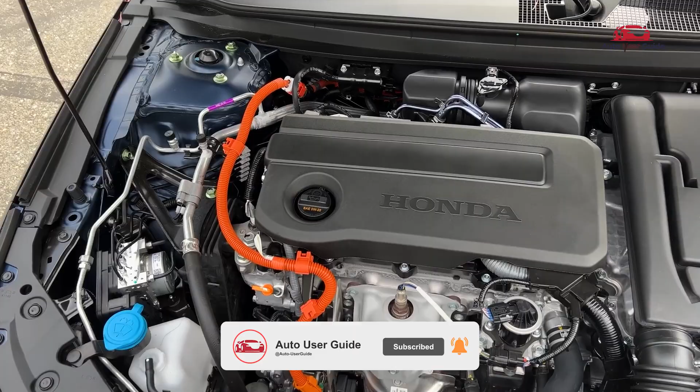Are you trying to locate the fuse box in your 2022 Honda CR-V? Wondering where each fuse is placed or how to read the fuse box diagram correctly? In this guide, we'll walk you through the exact location of the fuse box and provide an easy-to-understand diagram to help you identify the fuses for various systems.

Engine compartment fuse box. This panel houses various fuses and relays that protect and control essential electrical components of the vehicle. Inside the fuse or relay box cover, you'll find a label detailing the fuse and relay names along with their respective ratings.

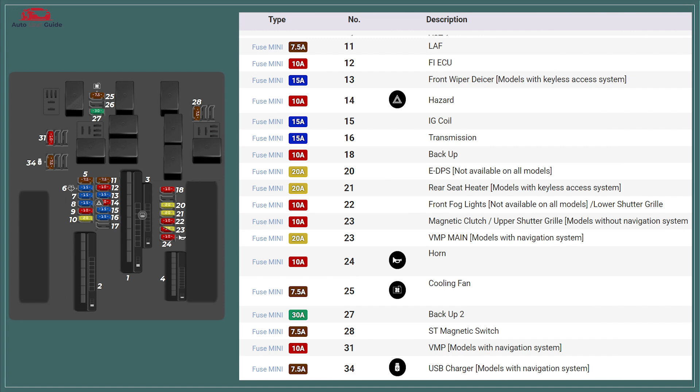Engine compartment fuse box type B. The engine compartment fuse box type B distributes and protects electrical power to key engine and vehicle systems using fuses and relays.

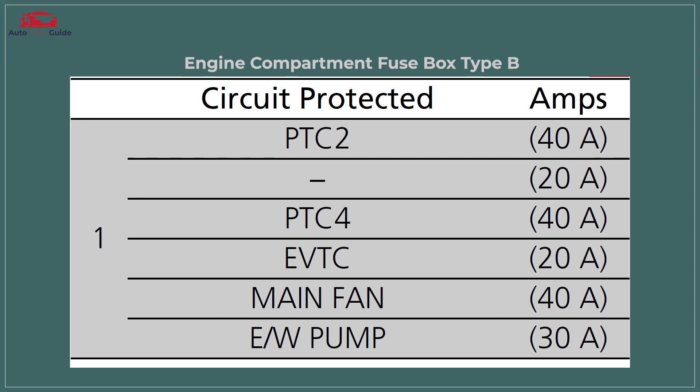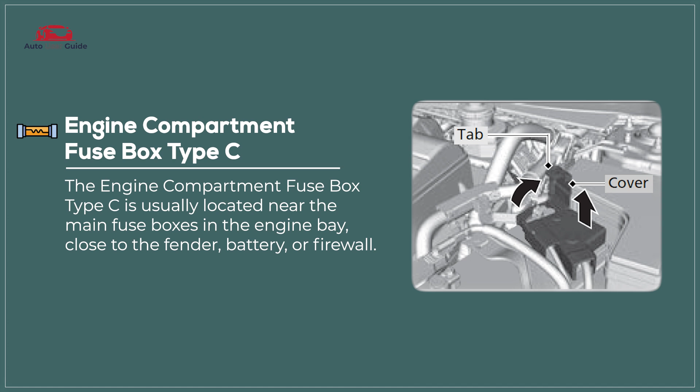Engine compartment fuse box type C. The engine compartment fuse box type C protects extra circuits for advanced systems and high-load components.

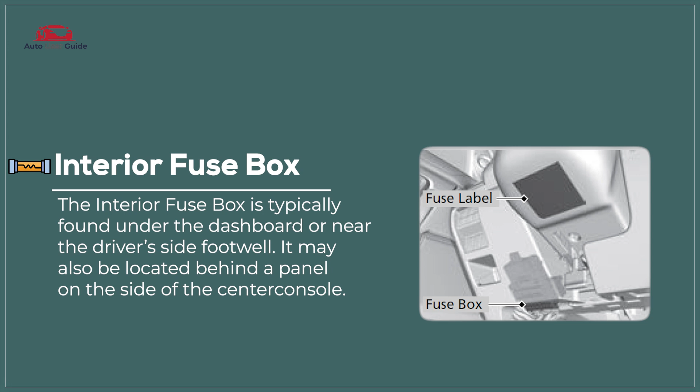Interior fuse box. The interior fuse box manages and protects electrical circuits for various in-cabin functions such as lighting, audio systems, power windows, and climate control. It contains fuses and relays that help prevent damage caused by electrical overloads or short circuits.

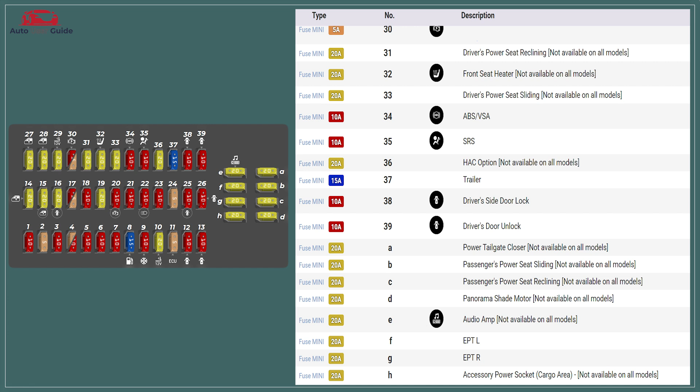Glass tube fuse, AGC fuse, SFE fuse. Ceramic fuse, Bosch fuse, DIN fuse.

PAL fuse, conditions: low profile fuse, standard PAL fuse. Link fuse, mega fuse, high amperage link fuse.

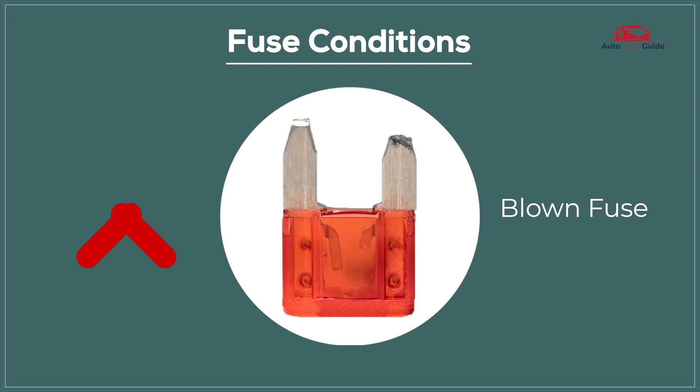A blown fuse means it's no longer functioning and needs replacement, while a perfect fuse is in good working condition and performing as expected.

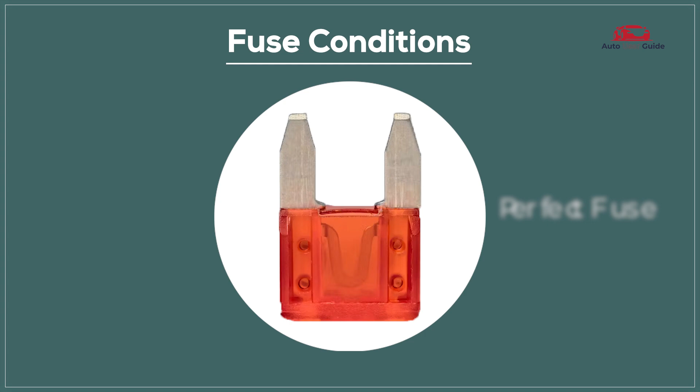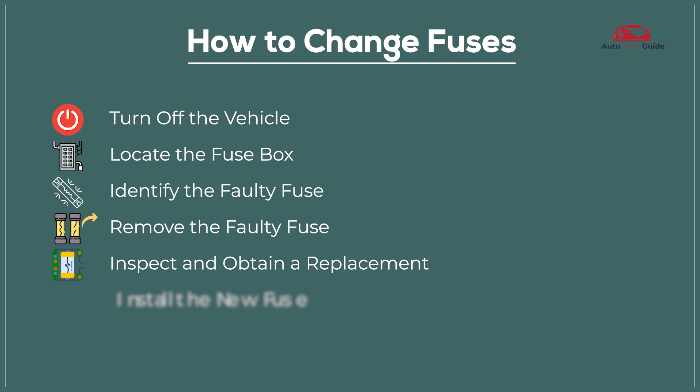How to change fuses: turn off the vehicle, locate the fuse box, identify the faulty fuse, remove the faulty fuse, inspect and obtain a replacement, install the new fuse, test the replacement.